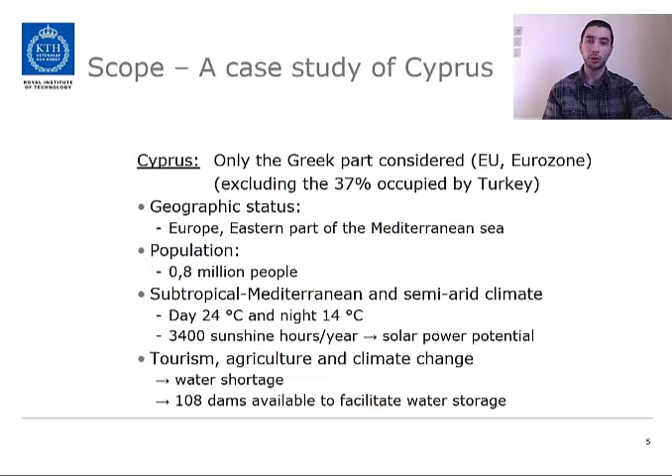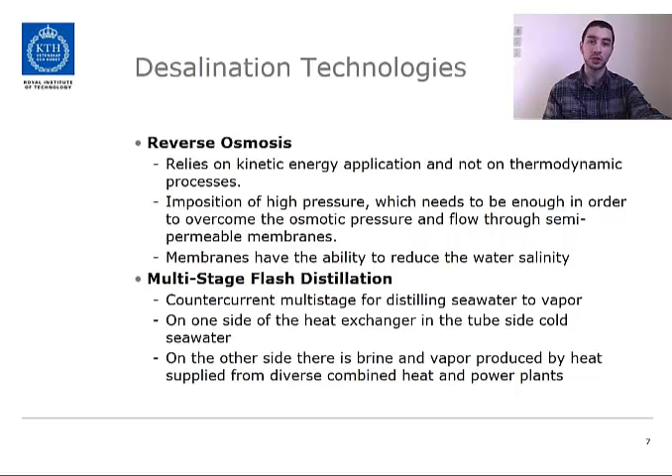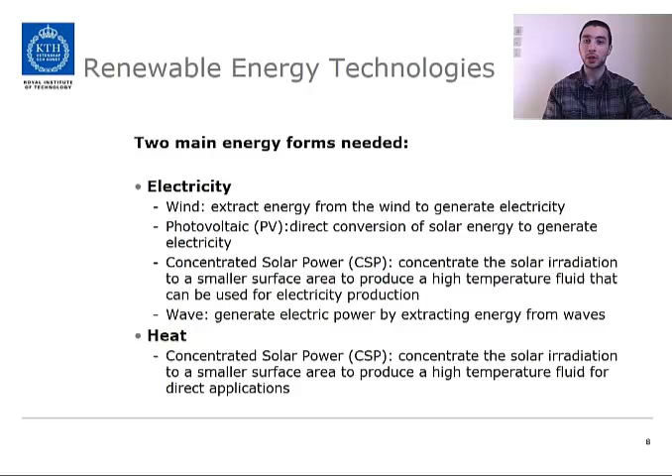The two dominant desalination technologies are reverse osmosis and multi-stage flash distillation. The first one relies on kinetic energy application, while the second one on heat exchange and thermodynamic processes. This model considers reverse osmosis. Renewables can contribute to the desalination process by producing either electricity to drive the kinetic energy applications or heat to be used directly in thermodynamic procedures. This study includes wind power, photovoltaic, and concentrated solar power for electricity generation.

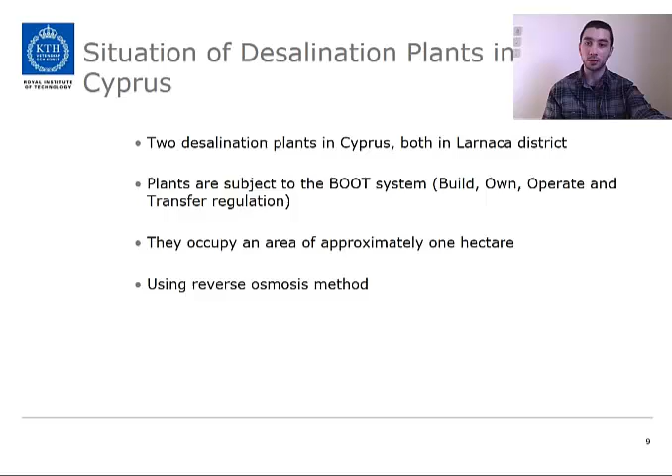Currently, there are two reverse osmosis desalination plants in Cyprus, both located in Larnaca. They are subject to the so-called BOOT system regulation, standing for Build, Own, Operate and Transfer. Power generation in Cyprus relies entirely on imported oil. However, there is significant solar and wind power potential that could contribute a large share to the national energy mix in the future. Biofuel production doesn't constitute a feasible option due to lack of large farmlands and water scarcity.

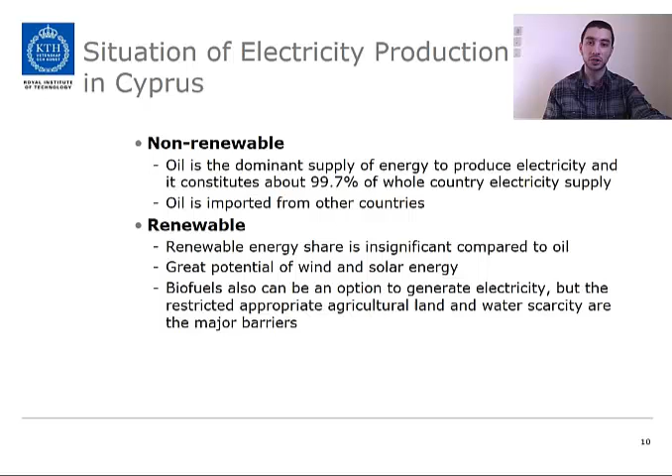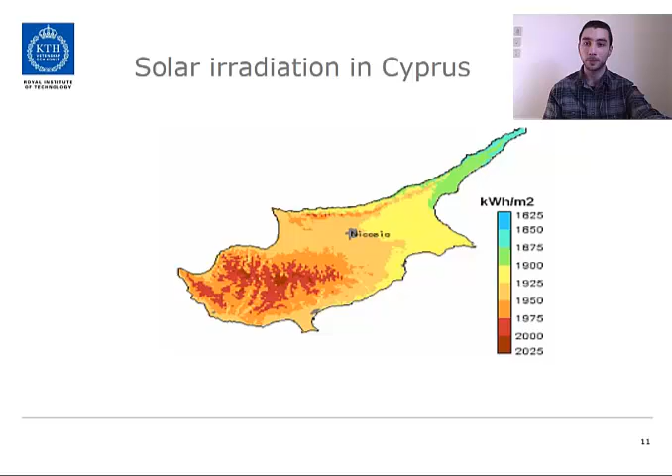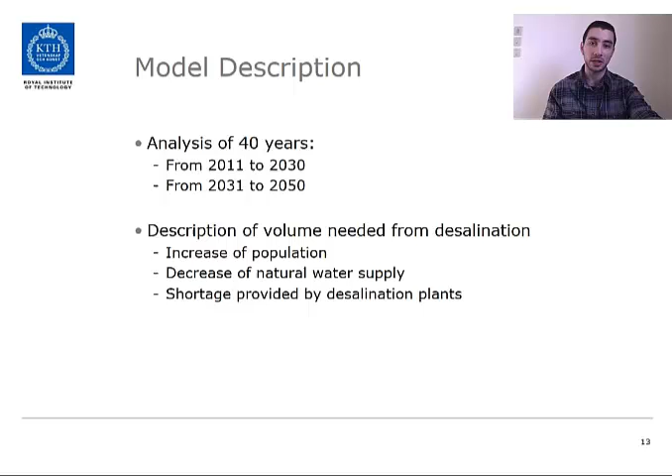Coming to our modeling approach, the analysis is split in two time periods. First, we have the analysis for the years from 2011 to 2030, while the second part runs from 2031 to 2050. The model considers the increase of population in Cyprus, which naturally leads to augmented water demand, the decrease of natural water supply due to climate change, and the demand deficit is met by desalination.

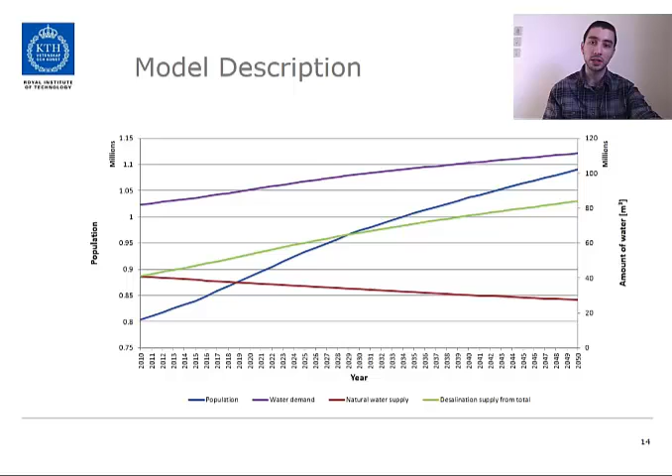This chart depicts the previously mentioned trends. On the horizontal axis, you can see the horizon, while on the vertical axis, on the left side, there is the population change. On the right side, the annual water demand follows the population increase, the natural supply constantly declines, and thus the need for desalinated water increases. The existing desalination plants consume 4.5 kWh per cubic meter of water produced, while the new ones are a bit more efficient and the respective consumption ratio is equal to 4.

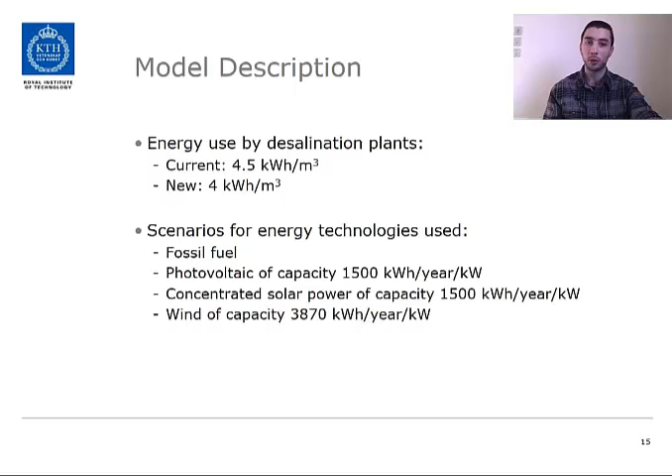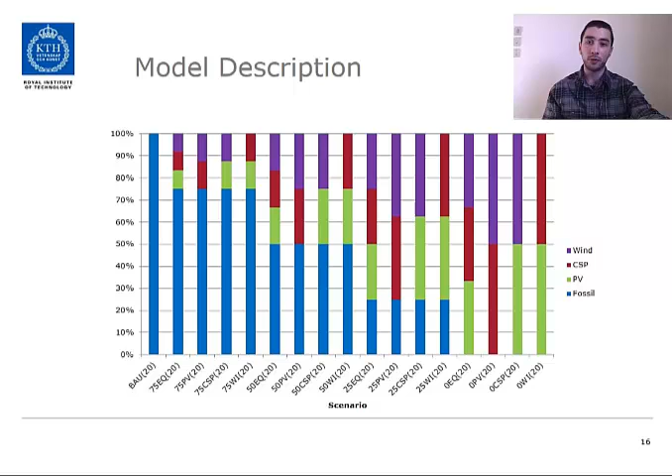The formulated scenarios took into account the current use of fossil fuel as well as particular capacity factors for PV, CSP and wind power in Cyprus. Playing around with the share of each technology in the power generation, 17 scenarios were finally formulated. In this graph, you can see the breakdown of each scenario. Here you have the numerical values considered in this model. It's worth noting that these figures are considered stable over time. Each of the previously shown scenarios was reanalyzed for a CO2 price twice as high as the existing cost, doubling the total number of cases.

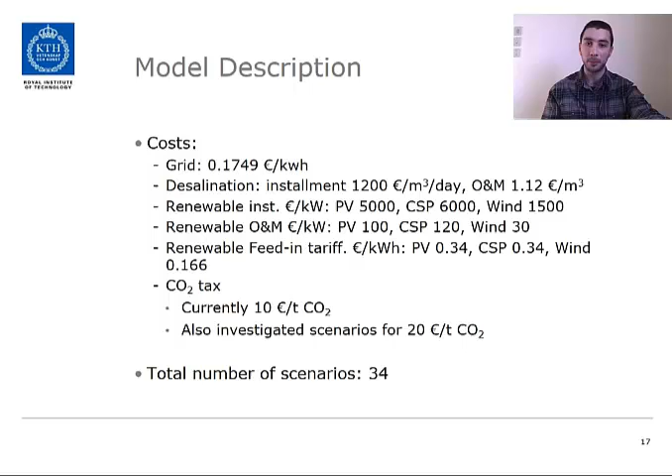At this point, I will present the results for selected scenarios, starting with the effect of the share of fossil fuel use on the accumulated CO2 emissions and cost. As it can be observed here, the decline in the share of fossil fuel use leads to a proportionate decrease in the CO2 emissions. It has to be mentioned, though, that in the first time period, the aggregate carbon footprint cannot be totally eliminated, since we have set 2010 as the base year.

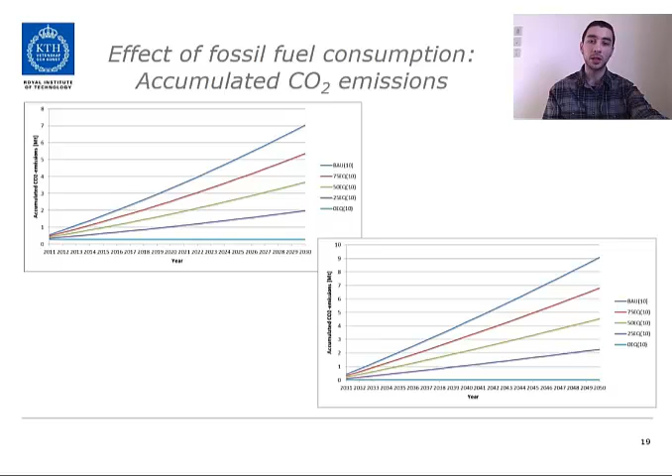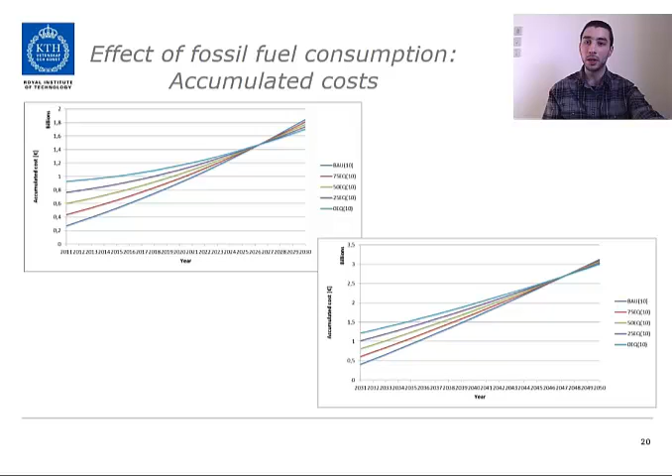Regarding the accumulated cost, as you can see, the higher the use of renewables, the higher the capital cost and the lower the annual increase. All the trends converge at almost exactly the same point, which is roughly 16 to 17 years after the beginning of our analysis. After the intersection point, the lower the share of fossil fuels, the lower the cost. All these trends consider equal share of each renewable.

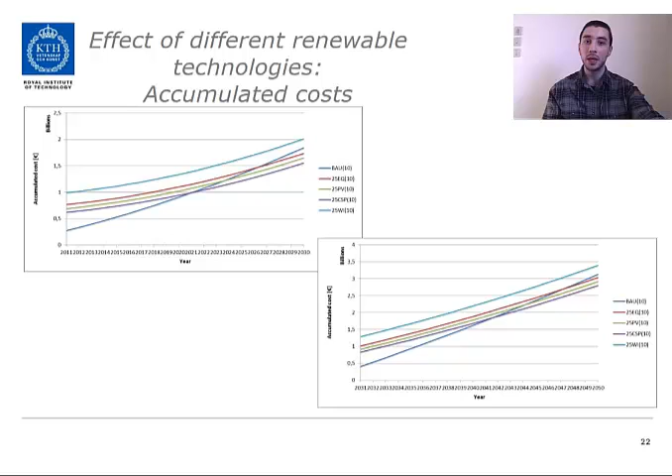Now we'll see how the accumulated cost is affected by the penetration of different renewable energy technologies in the system. In this case, its name denotes the exclusion of one technology and the division of the share of the renewables in the remaining two. It is clearly observed that excluding wind power is definitely not a good option, while the most cost-effective solution in the long run is the energy mix without CSP.

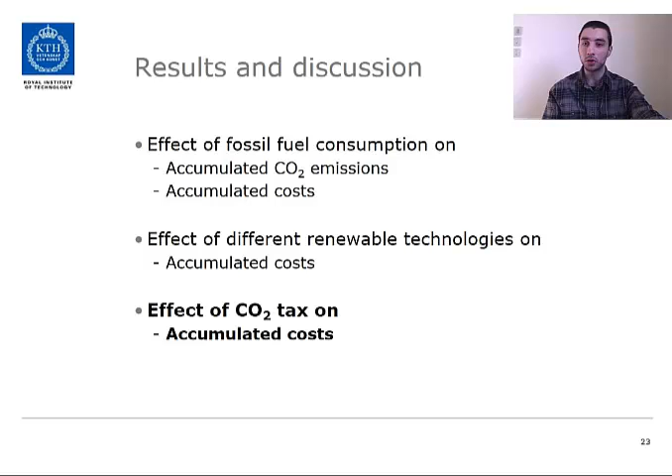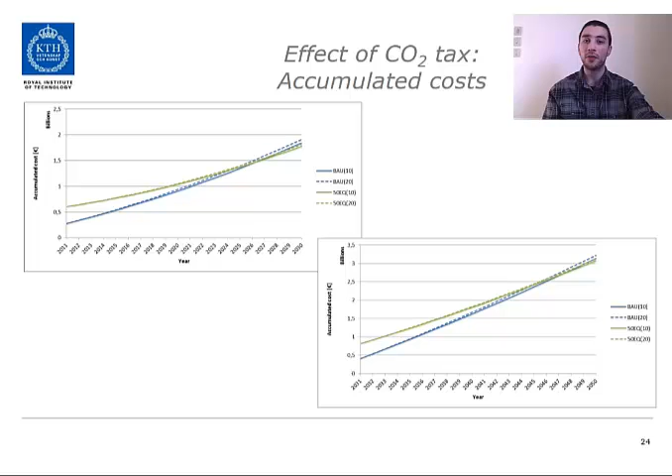Finally, let's take a look at the effect of CO2 tax on accumulated cost for two selected cases. As this chart demonstrates, doubling the price of CO2 wouldn't have a significant impact in our case. What it would actually do is to speed up the process of convergence in favor of renewables by a few years.

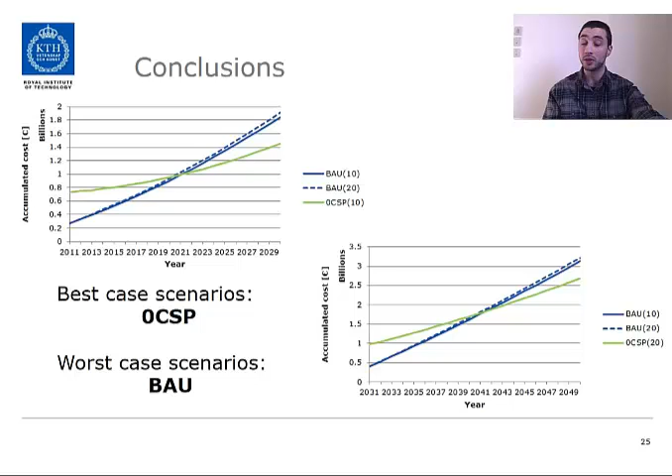The conclusion that can be drawn from the current analysis is that both from an economic and from an environmental point of view, the most competitive scenario is investing entirely in renewables but not CSP, while the business as usual scenario is the worst case. Taking everything into account, it is concluded that high investments in renewables have to be pursued since they will have a decent payback time, but only PV and wind power must be considered in the plan.